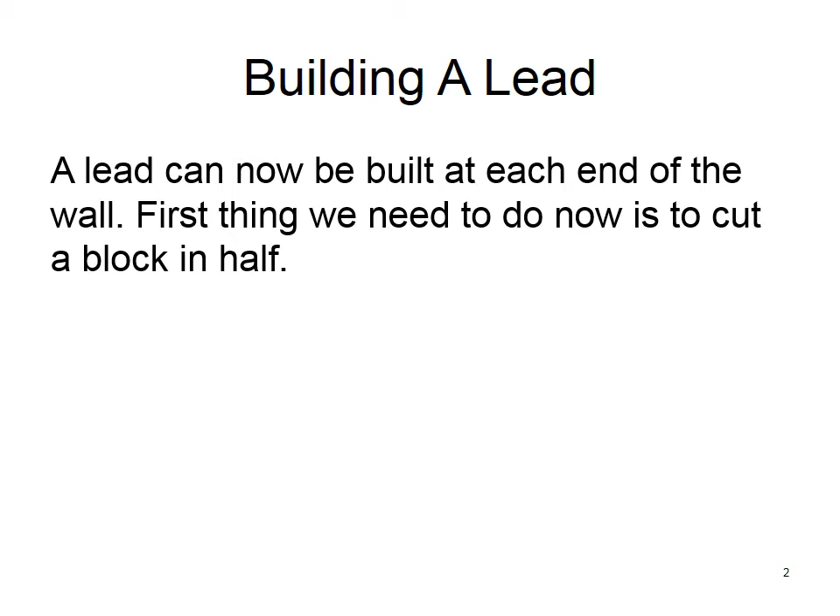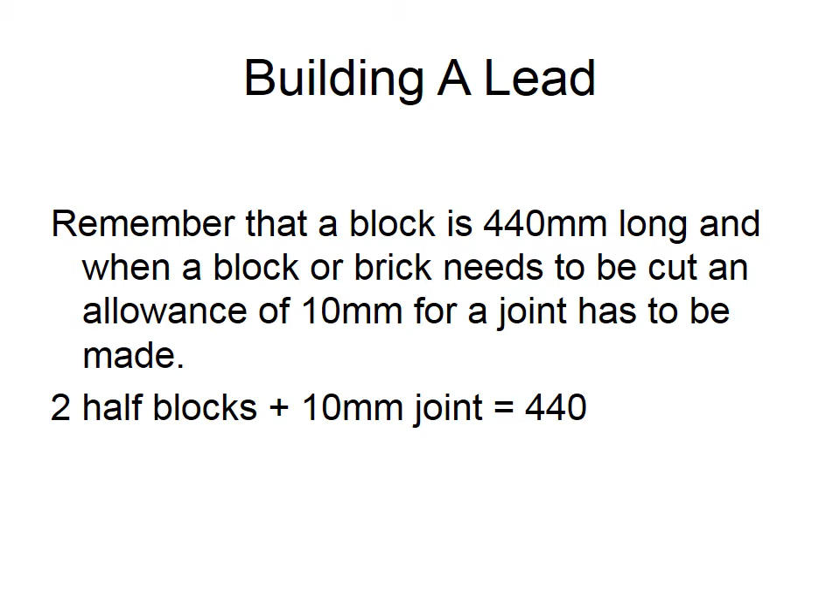A lead can now be built at each end of the wall. The first thing we need to do is cut a block in half. What is the measurement for a half block? Remember a block is 440mm long, and when a block or brick needs to be cut, an allowance of 10mm for a joint has to be made. So 2 half blocks plus a 10mm joint will equal 440mm.

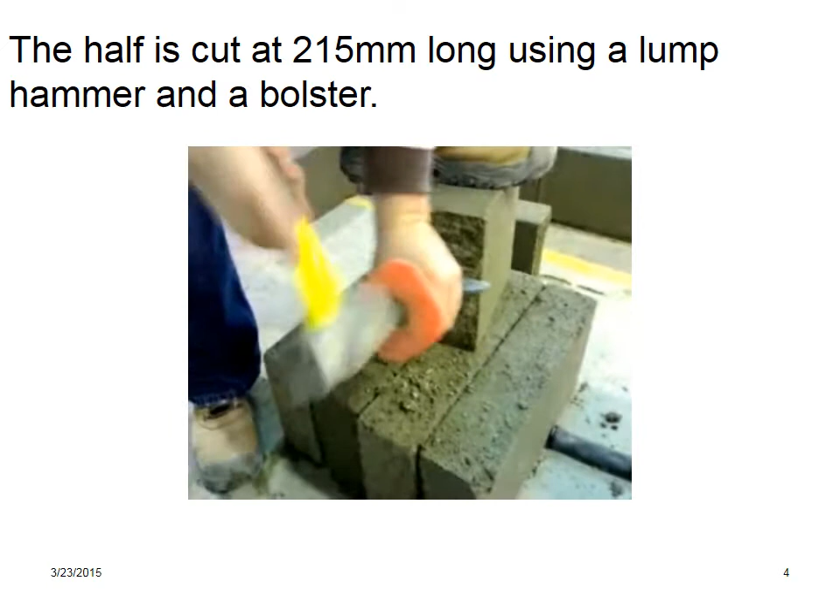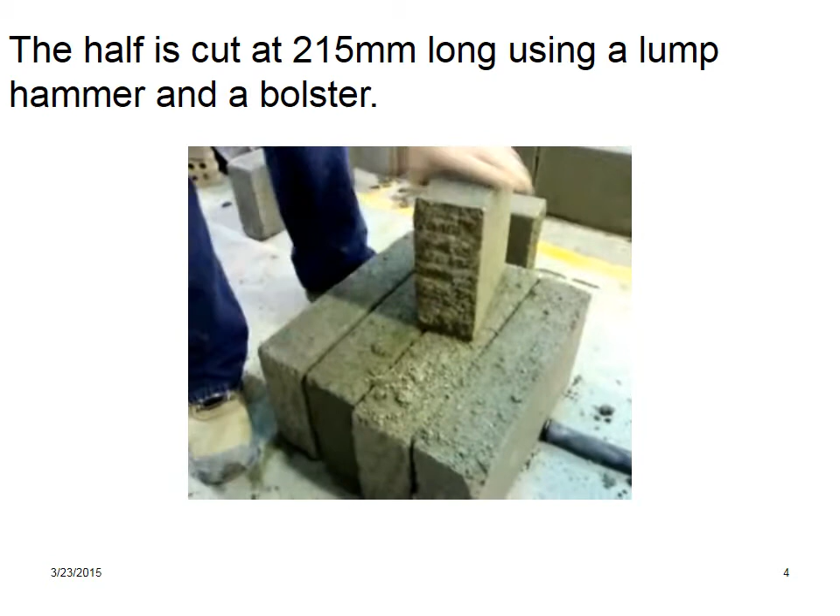Two halves from one block, 215mm each.

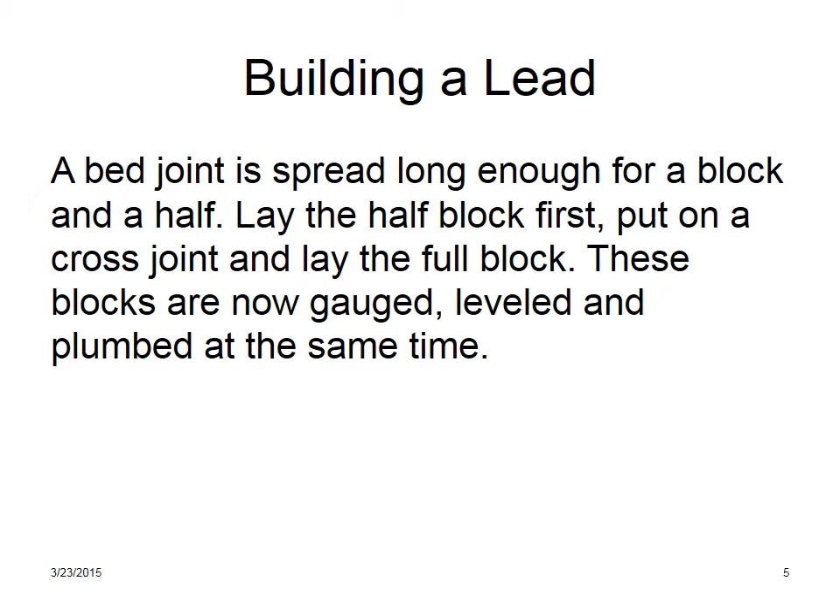Now when it comes to building the lead, a bed joint is spread long enough for a block and a half. Lay the half block first, put on a cross joint and lay the full block. These blocks are now gauged, levelled and plumbed at the same time.

The image shows the lead built up for the second course. We can see that the half block is on and the full block is on.

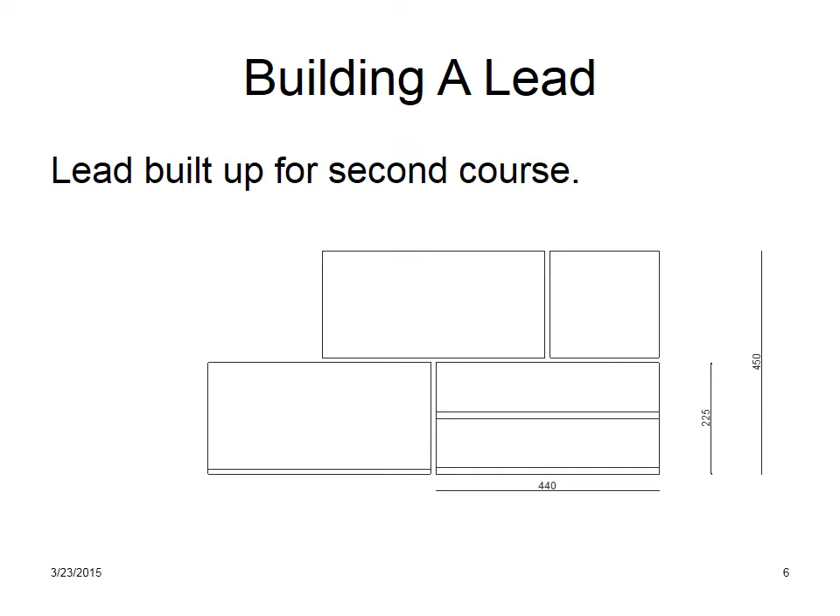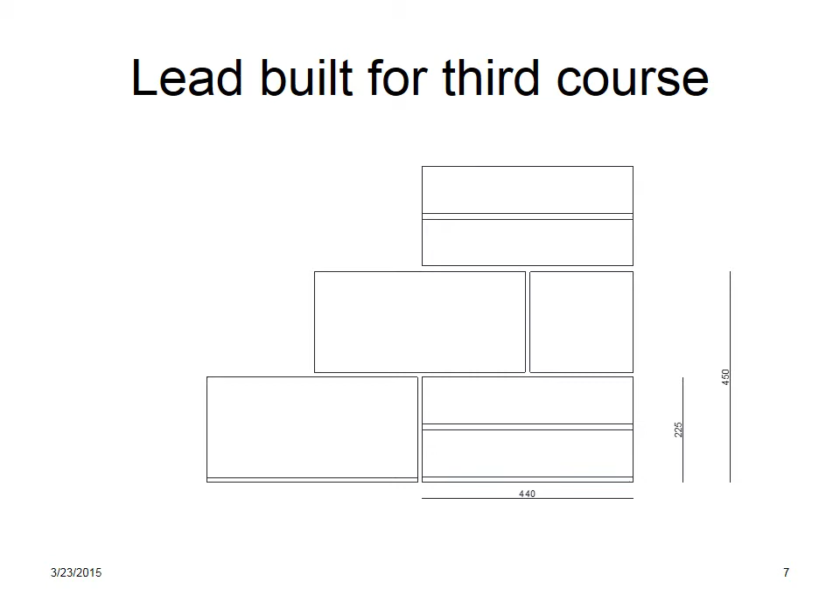Lead built for the third course. If we look at the image now, we can see that the third course and the first course are the same. So the lead is built, we'll lay 2 blocks flat. Remember, because the blocks are a bit heavier, you might have to bed it a bit deeper, so your bed could be up about 18-20mm.

Try and line it up at this edge and with this edge here, and just put the cross down onto it.

Okay, so I'm going to check the gauge on this now.

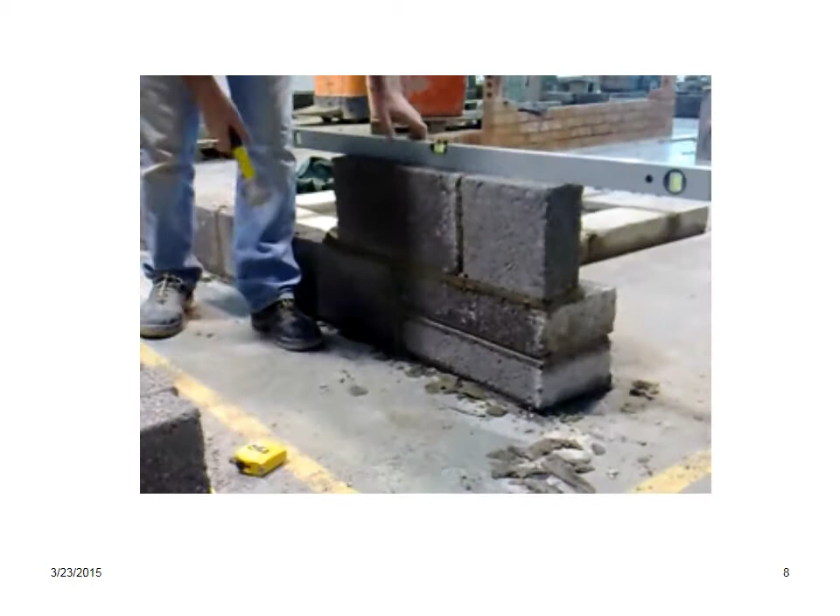The reason why this is working is we took the time to make sure we got our bottom course bang on level. So when we're putting the blocks on and keeping the bed joints fairly consistent, you should be coming in pretty close to level as well.

Okay, so I have that level, so I just have to check up a plumb now. Check up a plumb along here.

That's pretty good for plumb there, from the face. Go there, so I have to kick them back in there.

Okay, there. Just going to check it here now as well.

See the way Joe has his foot on the bottom of the level, he's keeping it tight into the first course, into the face of the first course when he's plumbing up.

Pretty good. Now just range the two of these in, make sure they're in line with each other.

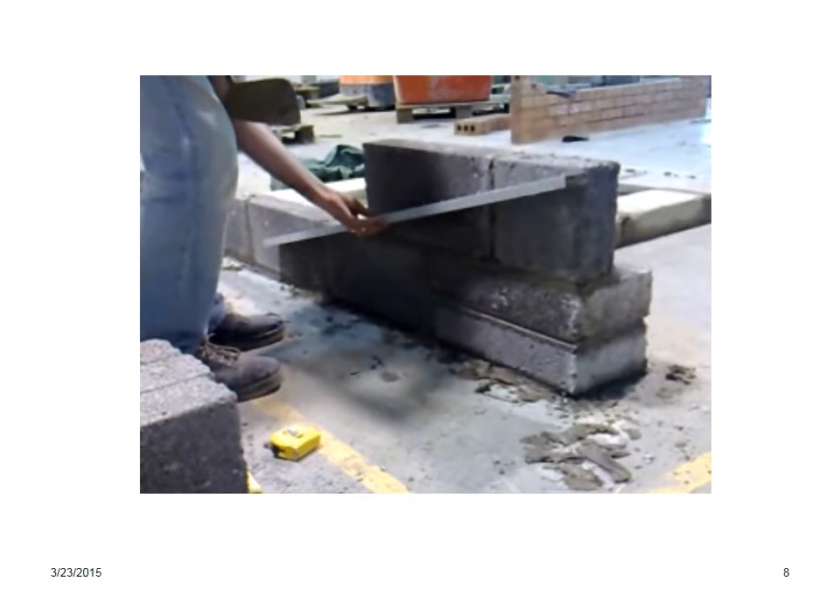Okay, so happy enough with that. Then just fill in the joint at the back.

Small bit of mortar in here just to make sure I keep the blocks clean. Lay the block at the back of this, okay?

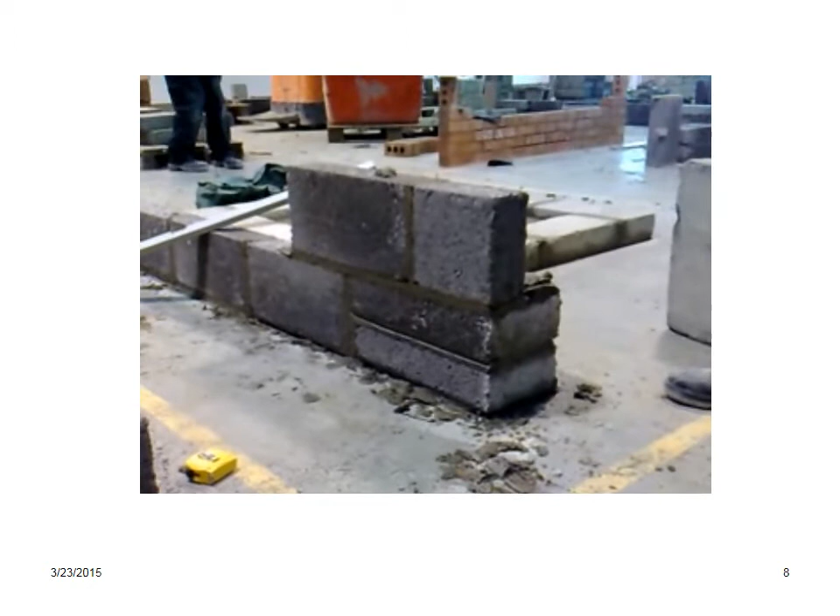Just a little tip for you when you're here. I'm just going to cut that mortar there at an angle like that, okay? I'll just cut that mortar at an angle like that. And the reason I cut the mortar at an angle, if I have it pushed up against that, when I put the block on, it's going to straight away start pushing the mortar against this.

So I don't want to do that, so I just have it kind of angled out a bit, so that this block will just be pushing down.

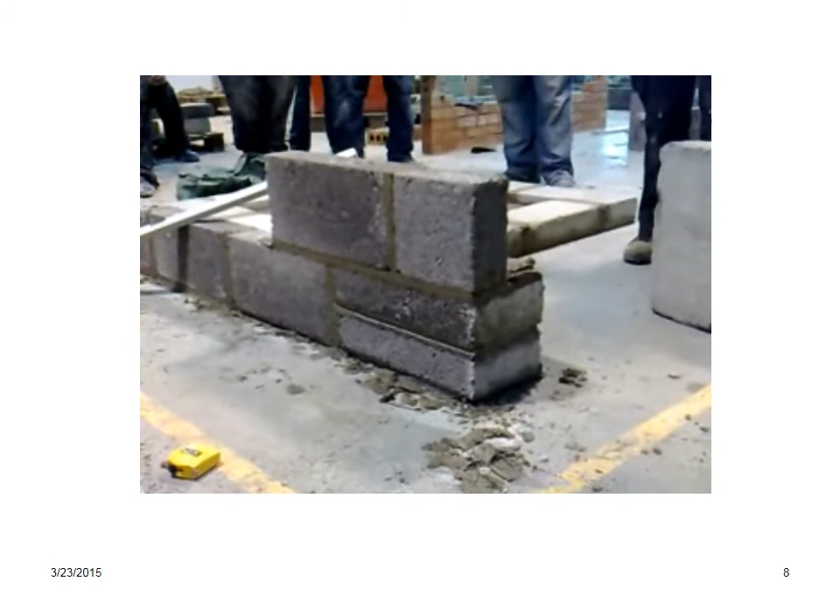I'm going to put a joint on this end and this end, but I'm going to put them fairly thin, okay? Because if I make it too wide, when I put the block on it'll start disrupting the blocks I've already made. You don't want anything moving these now, so I'll just put the joint on here fairly thin.

Again, when I put the block on, just watching, make sure I'm lining up the edges of the other blocks. Use this one here as a guide. Pretty level. Just check that it's level itself.

Pretty good at it. Now, all you can do with the back of this wall here, at this point, is just keep a check on it, dead plumb, because there's a difference in the thickness and width of the block. So what you do is put this block on and check it for plumb, make sure the block is sitting plumb within itself. Measure the 215, and you can measure across the 215 as well. So I'll check it for plumb this way.

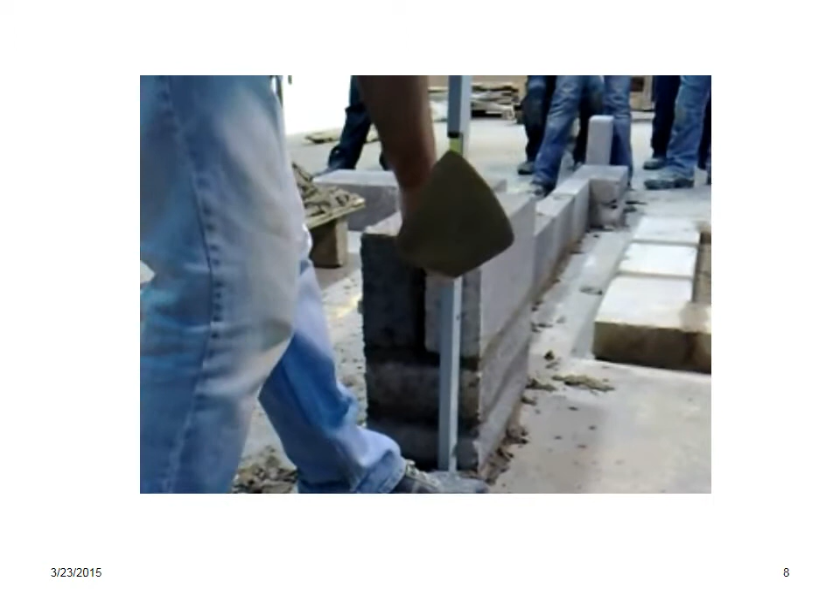It's okay. Just going to check it for plumb in itself. And you can't plumb that end and that end because it's only the length of the block, so just keep it plumb this end here. Also just check to make sure that's right. When I put my block on top of this, I want to make sure it's sitting nice and flush. So that's there, that's gone for 215 there.

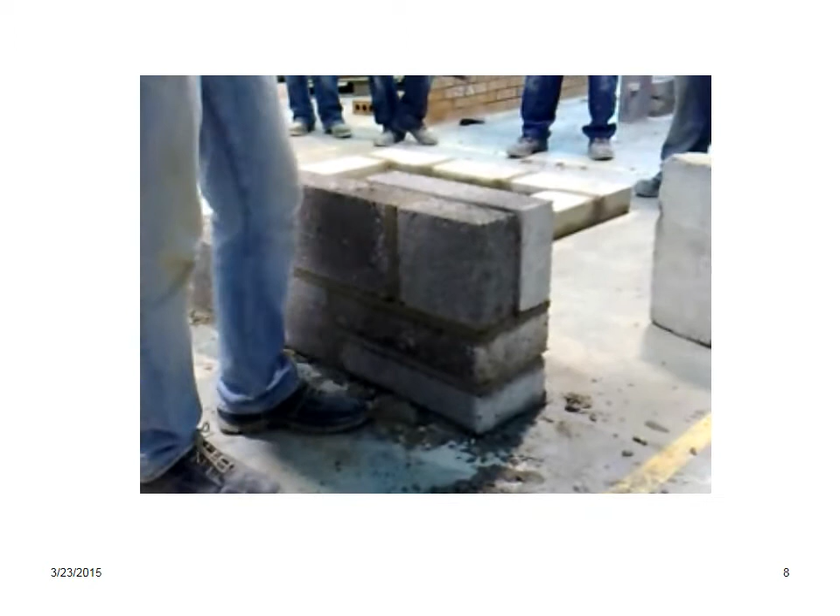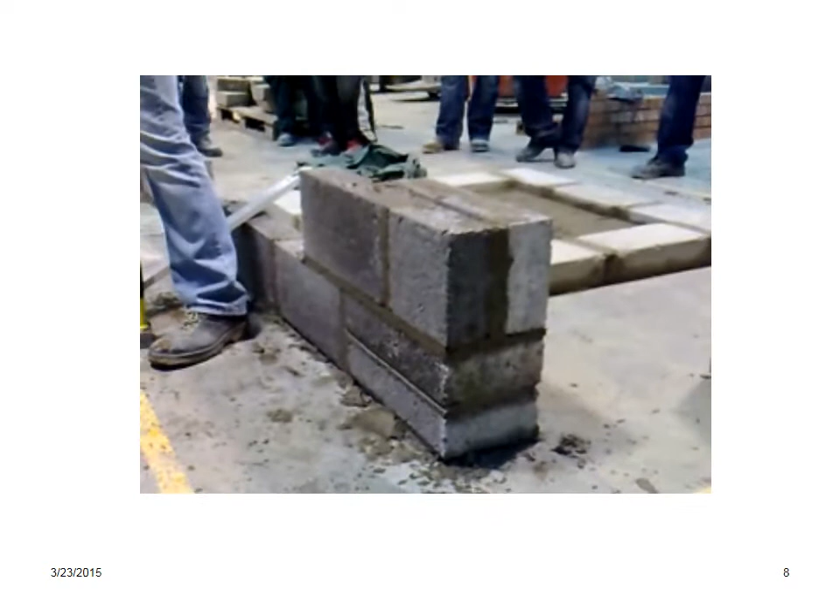Or another thing you could do is leave that joint until you have the other blocks on top built and then fill it in, so there'd be less chance of them spreading. Because when you have two blocks on flat sitting on top of that, there'd be less chance of the ones underneath moving.

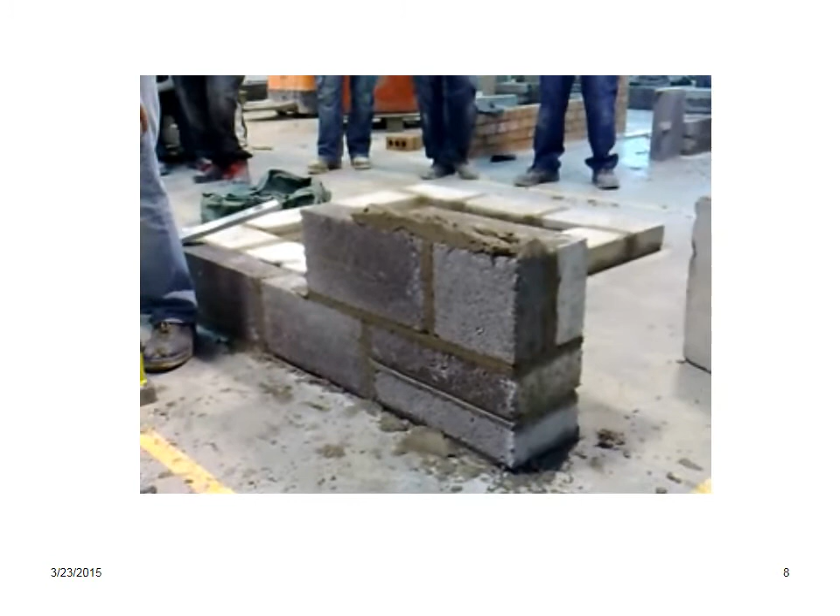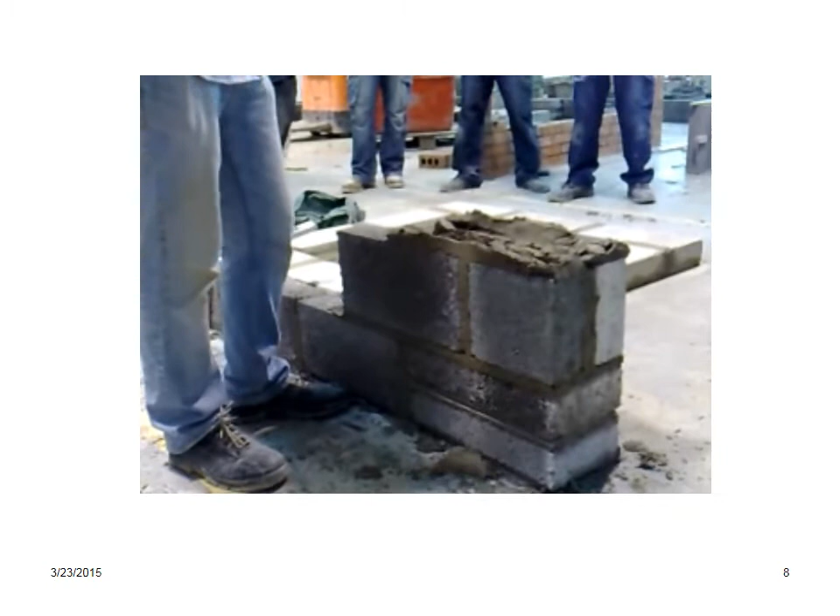So we'll be looking now when I have it. I've got 225 there, I'm going to be aiming for 450. So 112 onto 225, I'm going to be looking somewhere around 337, thereabouts. You don't have to be exact with it, but around there would be good.

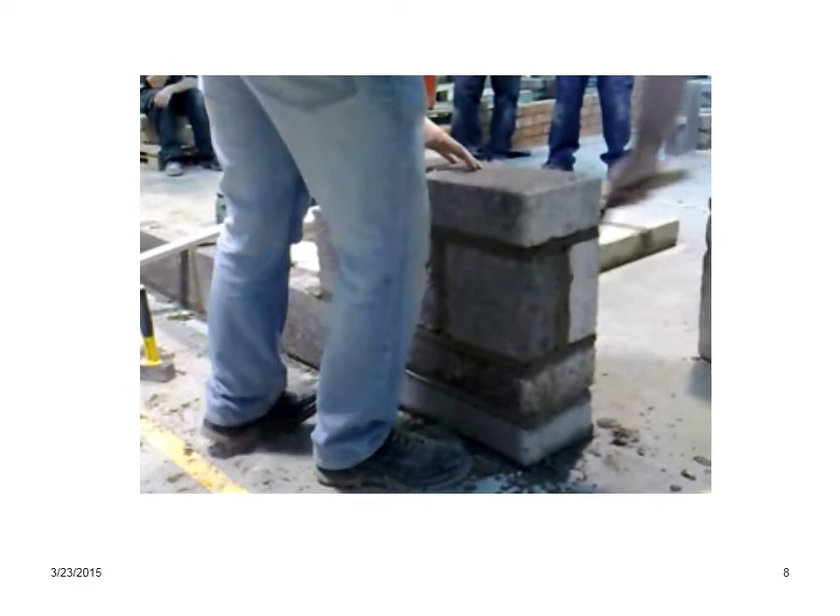As I'm putting it down, I'm just trying to watch to make sure I'm dropping it lined up with the other blocks below. A level. Just the level in itself.

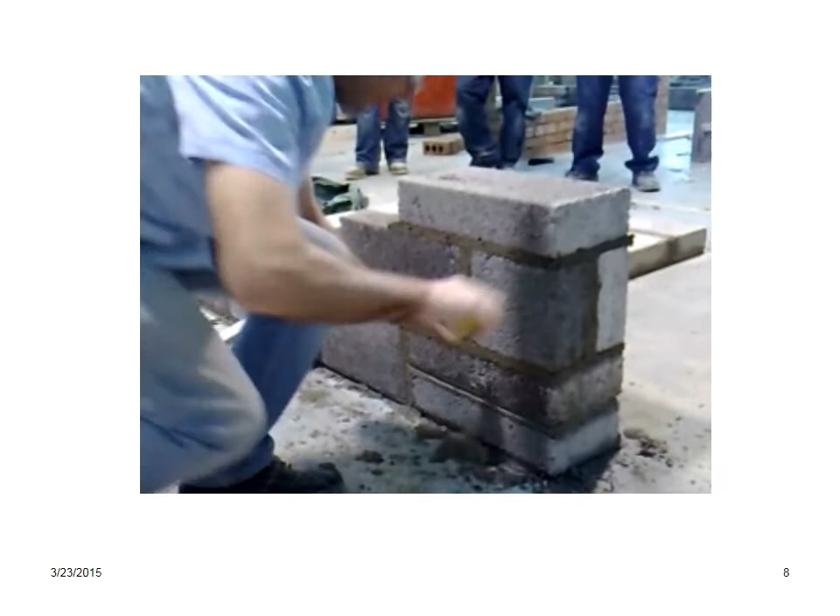I'll just tap it down a bit. Crossway. Now I'll have to check it for plumb. It's okay for plumb there now. I'm just going to range it from this point here down to this point here, just to make sure they're all touching off it.

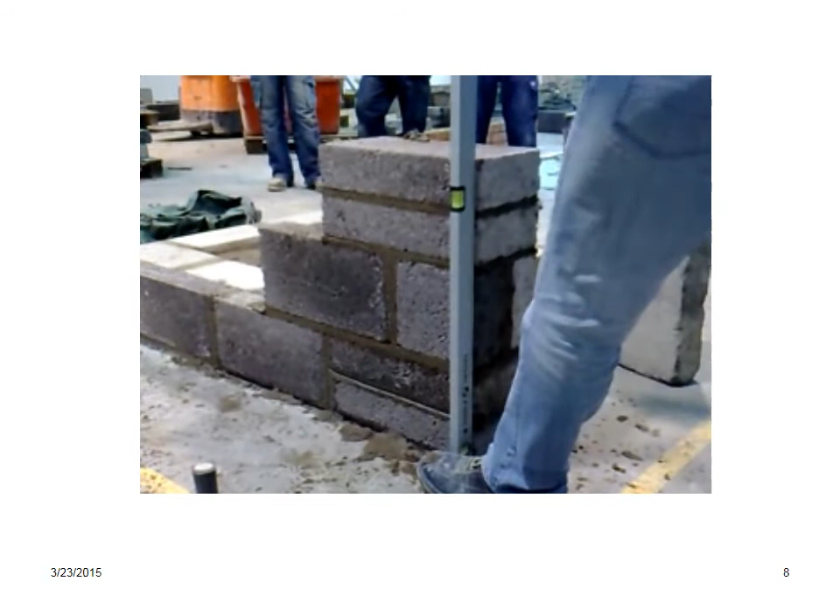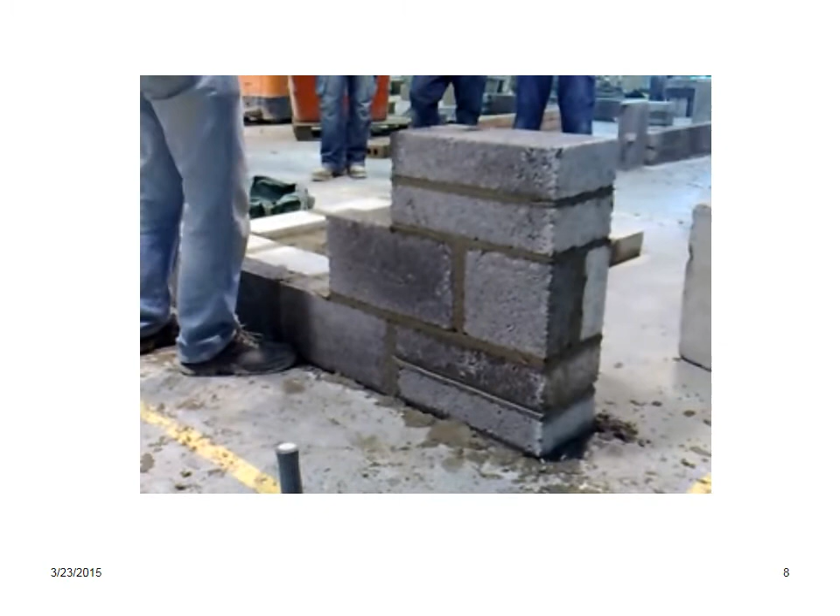That's pretty good for range right now as well. So once you've got that far, what you do is you do the stand, then you do the range, and then you just use your line like you did with the brickwork for running it in. So I just need to get a bit of a stick there now.

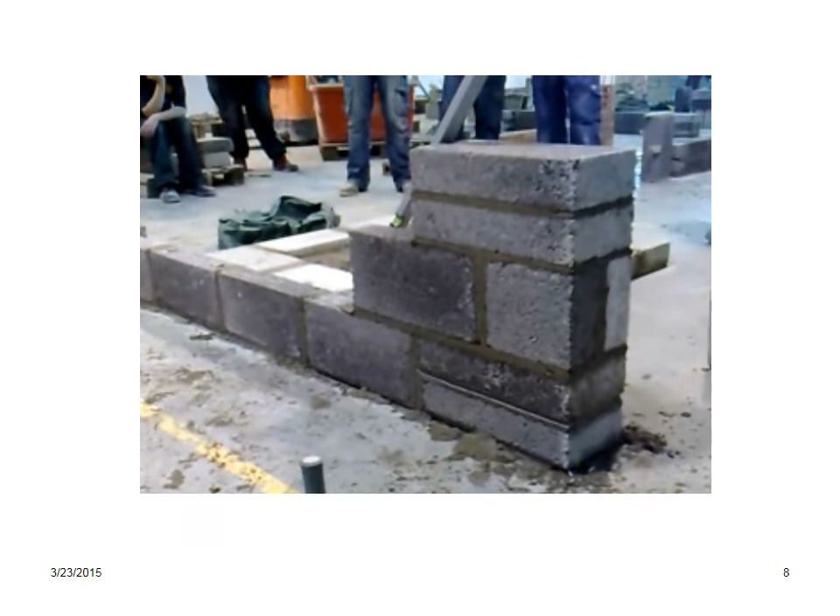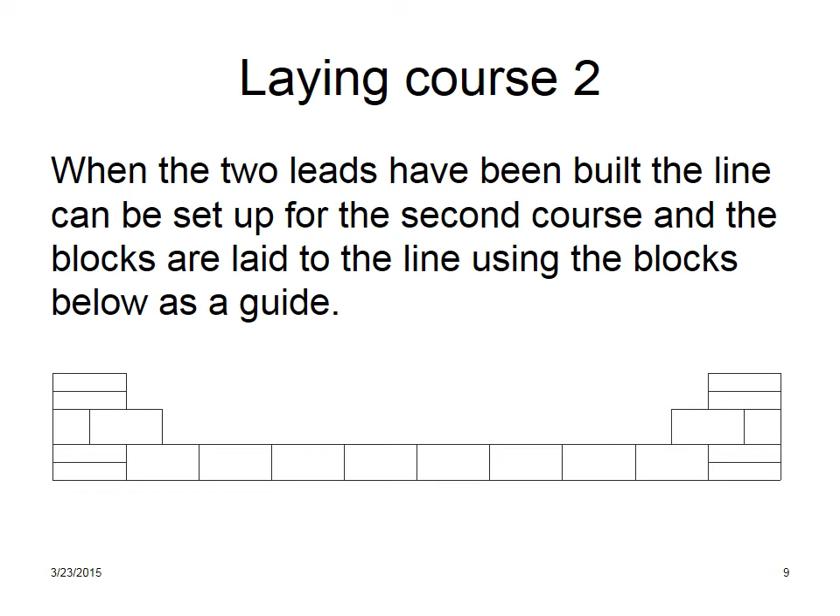Laying course 2: when the two leads have been built, the line can be set up for the second course and the blocks are laid to the line, using the blocks below as a guide. The line is then raised for the third course of blocks to be built. Once the third course has been completed, a lead can now be built at each end for course 4. Once the lead has been built, the last course can be run in using the line.